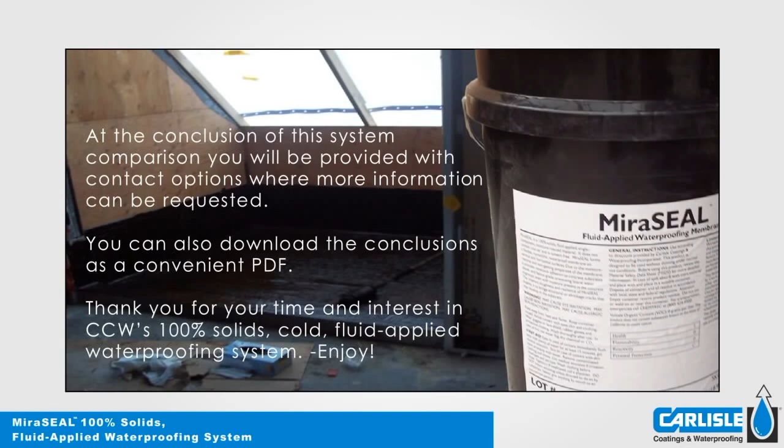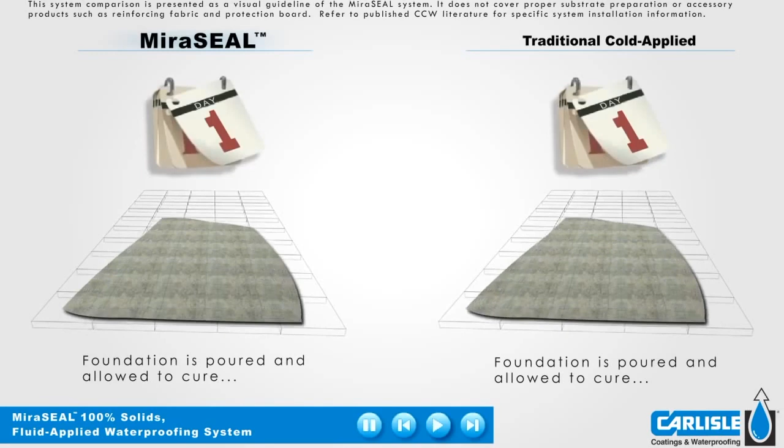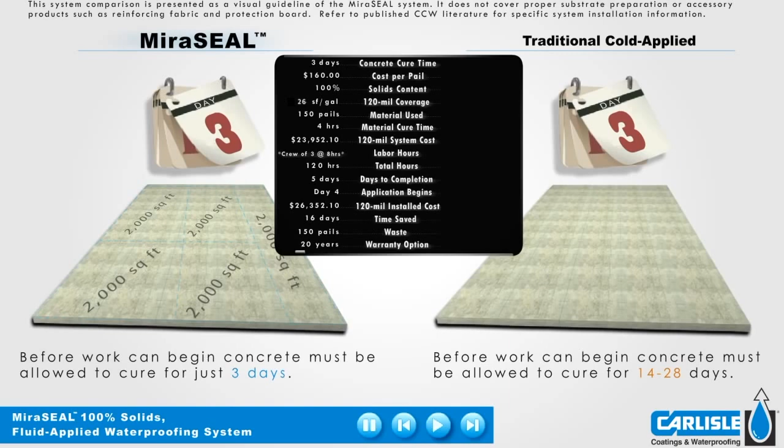Initially, the concrete foundation is poured in place. Once the concrete has set up firm enough to allow construction traffic, 3 days minimum, chalk lines are snapped in preparation for the waterproofing. MiraSEAL can be applied immediately after this 3rd day, where traditional systems require a 14-day minimum cure. Day 4 is the first day waterproofers should access the newly poured deck where MiraSEAL detailing can begin to be applied.

After the detailing is completed on flashing areas, the first 60 mil of MiraSEAL is applied. Reinforcing fabric is then installed, immediately setting it into the wet material. After a minimum 4-hour cure, the final 60 mil coat of MiraSEAL is applied. The completed system then requires a minimum 4-hour cure.

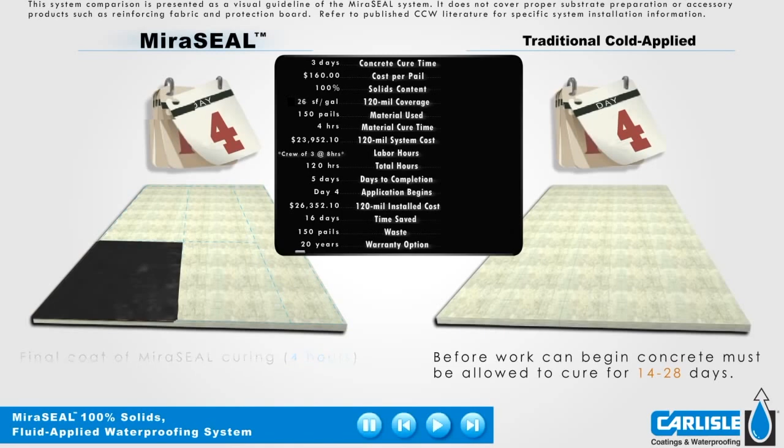Once the curing period has completed, a flood test is performed on the initial area. On day 5, while the flood test is being performed on the preceding section, detailing can begin on the next section. Then the 60 mil field membrane is installed.

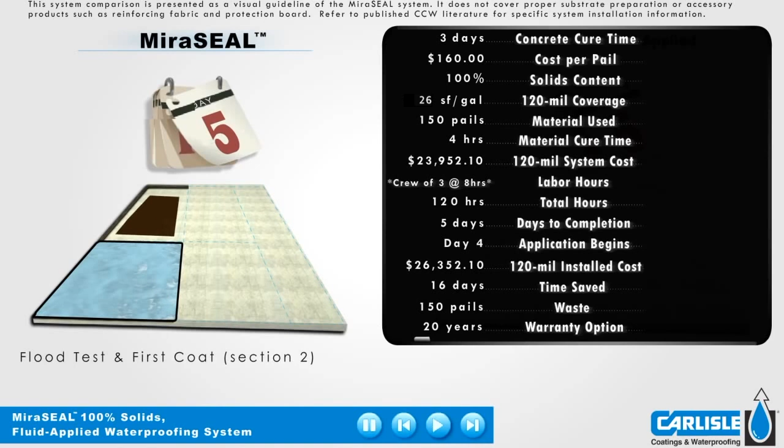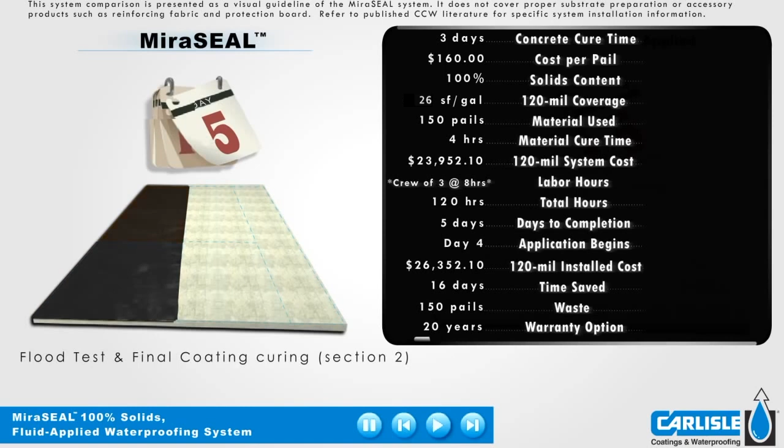The reinforcing fabric is installed into the first layer. Then the second layer is installed, both allowed to cure a minimum of 4 hours. As the flood tests are passed, the system is then covered with a protection board.

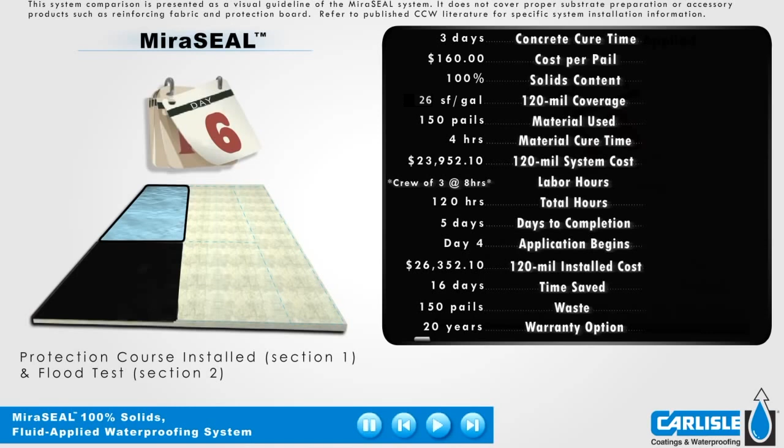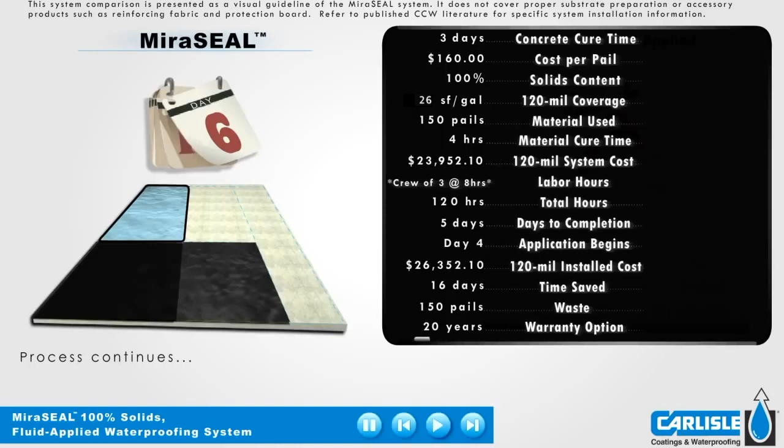On day 6, the flood test is performed on the second section, while the detailing is beginning on the third section. Again, the 60 mil of field coverage is applied as the process continues. Reinforcing fabric is then installed, immediately setting it into the wet material.

Next, install the final 60 mil coat and allow it to cure overnight. On day 7, another flood test is performed, this time on section 3, again while detailing is beginning on the next section.

Then the first 60 mil coat of membrane is applied on the deck and the reinforcing fabric is installed into the wet membrane. The final 60 mil of membrane is installed and allowed to cure for a minimum of 4 hours.

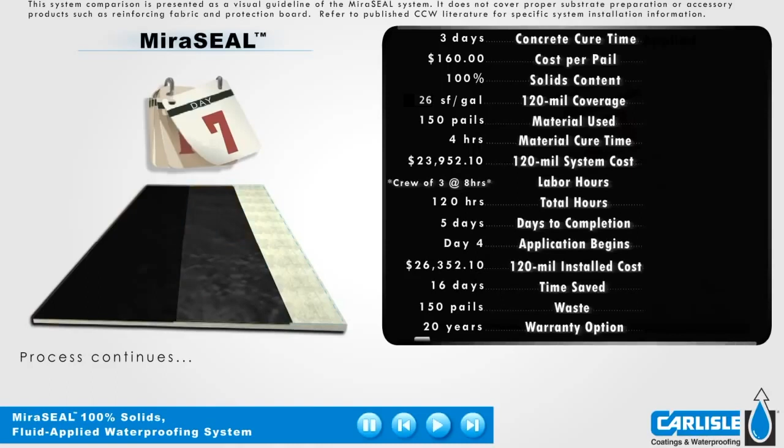On day 8, a water test is performed on the previous section while the detail coat is installed on the final section. The initial 60 mil coat is installed, the reinforcing fabric is placed onto the membrane, and the final top coat is installed and allowed to cure overnight.

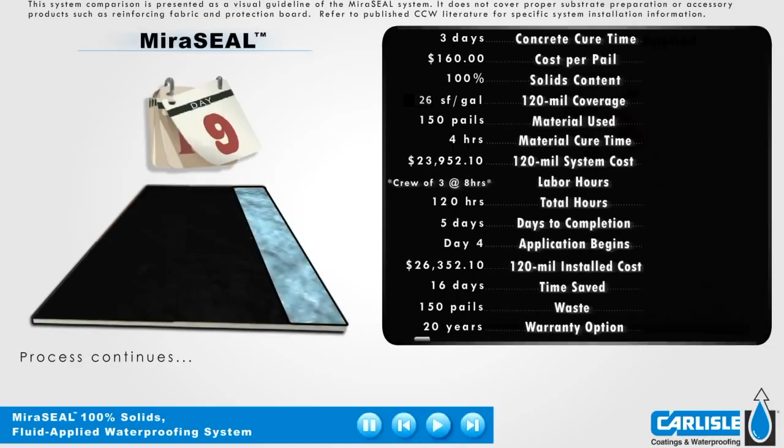On day 9, a final flood test is performed on the last section. On day 10, the protection board is installed and the MiraSEAL deck is completely waterproofed.

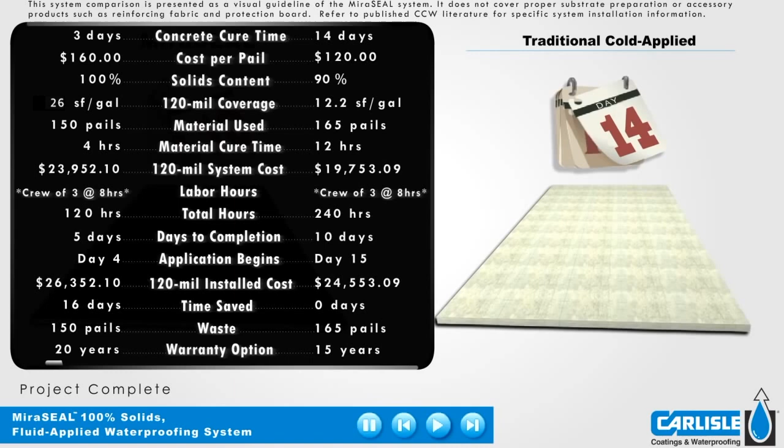Note that the deck is completed 5 days before a traditional system can even begin to be installed. On day 15, for traditional waterproofing systems, the deck can begin to be installed.

Like the MiraSEAL deck, there will be similar steps in the installation. However, cure time between each layer of the system is 12 hours minimum instead of just 4. Also notice the percent solids requires a thicker installed membrane to achieve the desired 120 cured mils.

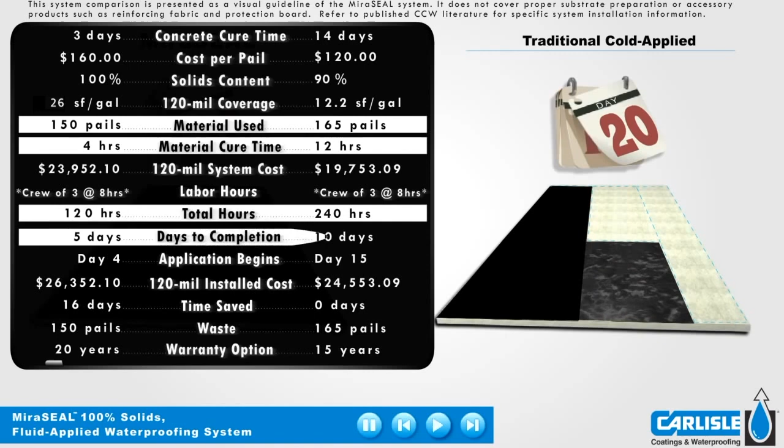In the center of the screen, notice the specific elements of the installed costs and the results between the systems. A few key differences to note are pails used, material cure time, total hours, days to completion, and overall time saved.

In summary, choosing a MiraSEAL system provides many benefits to the general contractor, the building owner, and the installer. With a MiraSEAL system, waterproofing a deck may begin earlier on the construction schedule and the system can be installed faster. Ultimately, more projects can be completed using MiraSEAL in the same time as traditional systems.

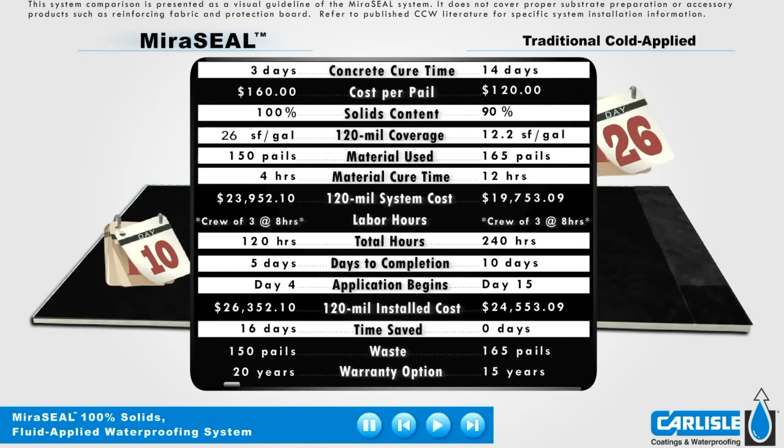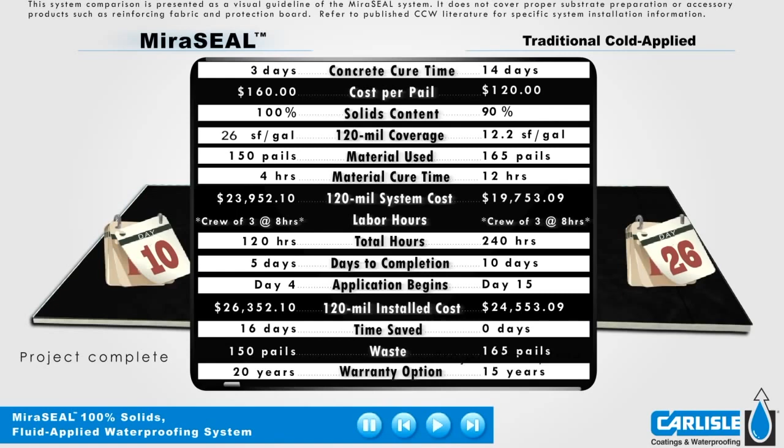100% solids means 100% coverage, all without odor which can affect installers or occupants. And finally, for added peace of mind, the MiraSEAL system comes with warranty options of up to 20 years from Carlisle, a highly respected waterproofing manufacturer.

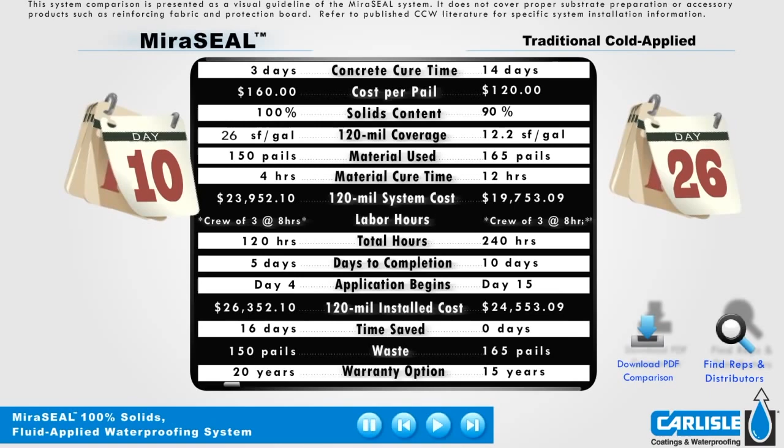What would you do with 16 extra days?